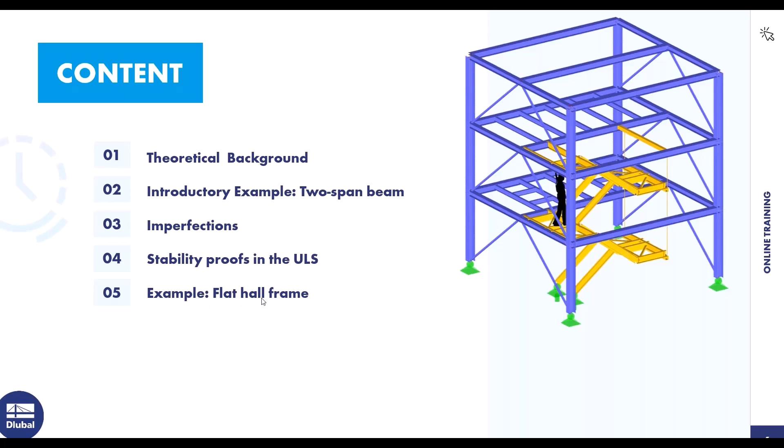First, I'll say something about the products for design according to EC3. The most important add-on is the steel design add-on. With that add-on, you can design steel members according to international standards like Eurocode, AISC, and so on. We calculate or design according to Eurocode today.

Then there's the add-on torsional warping. With that add-on, you can consider the 7th degree of freedom and the torsional warping. Then steel joints - with that add-on, you can analyze steel joints based on the finite element method. Then there's the cross-section program, RSECTION.

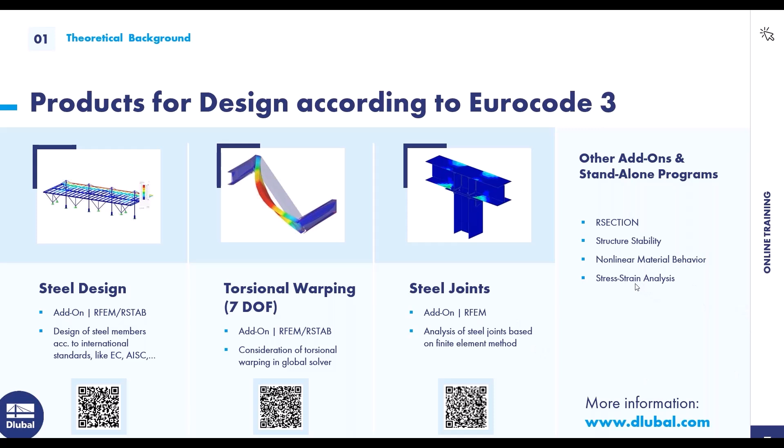Then the add-on structure stability - we use that add-on in the second example. Then there's the add-on nonlinear material behavior. You can, for example, consider a plastic design of steel plates and so on. And then there's the add-on stress strain analysis.

Okay, then a little insight into the whole safety concept in steel construction. The actions should always be smaller than the resistance. Those are the actions, this is the resistance. In addition, we have certain coefficients that we have to take into account depending on what type of proof is used. You can see the different coefficients here.

And those are the coefficients for the German national annex. You can see there is for the stability analysis another safety coefficient. But if you select the German national annex, for example, or another national annex, this coefficient is considered automatically from the program. It's automatic.

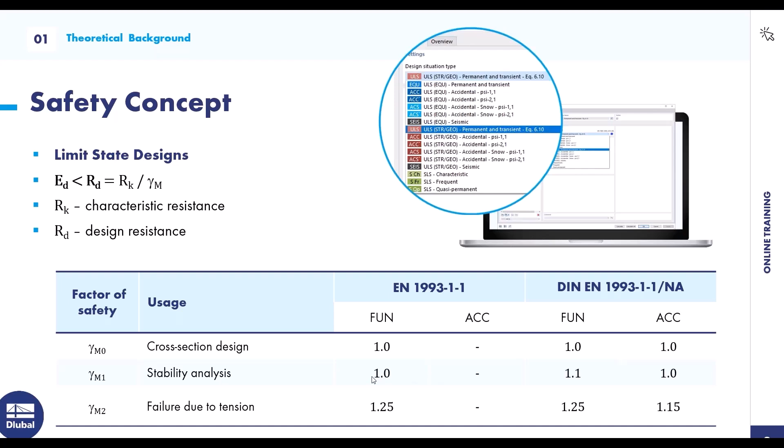So, okay, then the next slide. Elastic or plastic global analysis. Whether an elastic or plastic calculation is possible always depends on the cross-section classes. There are 4 cross-section classes.

The first cross-section class has a high rotational capacity, and this allows a plastic structure calculation. For example, you can consider plastic hinges, but it's not so often used in practice. And the cross-section resistance can be applied plastically.

Cross-section class 2 has a low rotation capacity; this allows an elastic structure calculation. And as with cross-section class 1, a cross-sectional resistance can also be applied plastically. The first and the second cross-section class are where you can consider a plastic cross-section resistance.

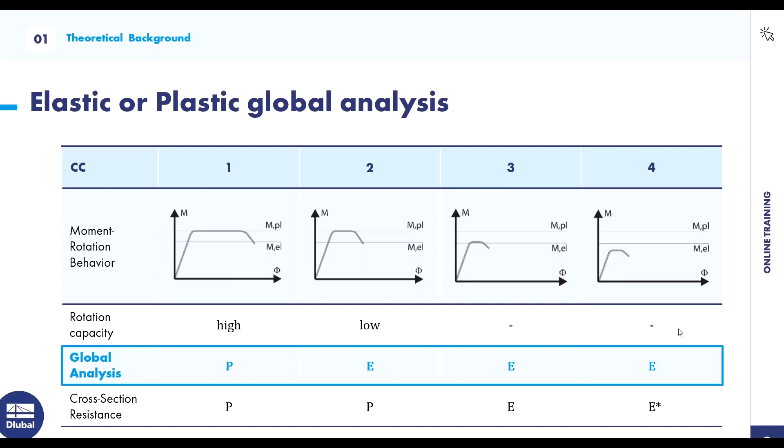Okay, then we turn to the next slide. That's the first example, the two-span beam, with a field length of 12 meters, 12 meters left and 12 meters right. A beam IPE 550, steel S235, a self-weight load case, and a load case with an imposed load.

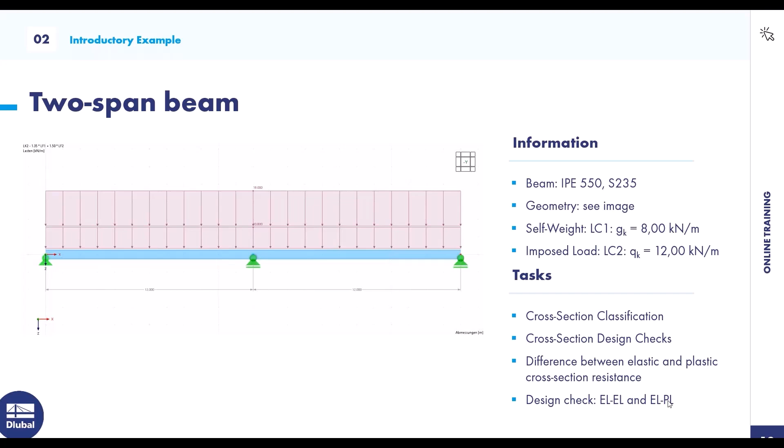And we will calculate or do a cross-section classification, cross-section design checks, the difference between the elastic and plastic cross-section resistance. We take a look at the design checks: elastic, and elastic-plastic. Okay, I turn to RFEM.

That's the second example, it's already prepared. But for the first example, I will model the complete structure. File, new.

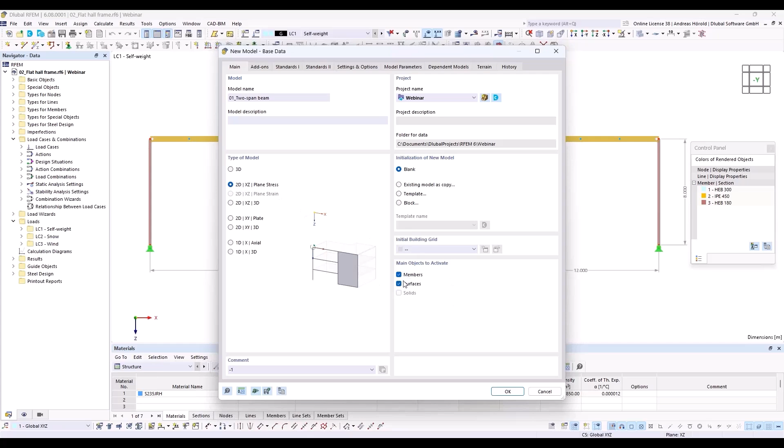So I enter 01_Two-span beam. Then type of model 2D is sufficient. We consider only members, but you can also select surfaces, that doesn't matter. And we select the steel design add-on.

Then we need to select the standards. You can see there are, for the load case classification and the steel design, different international standards. We select the Eurocode, and for today we are in Germany here, we select the German National Annex.

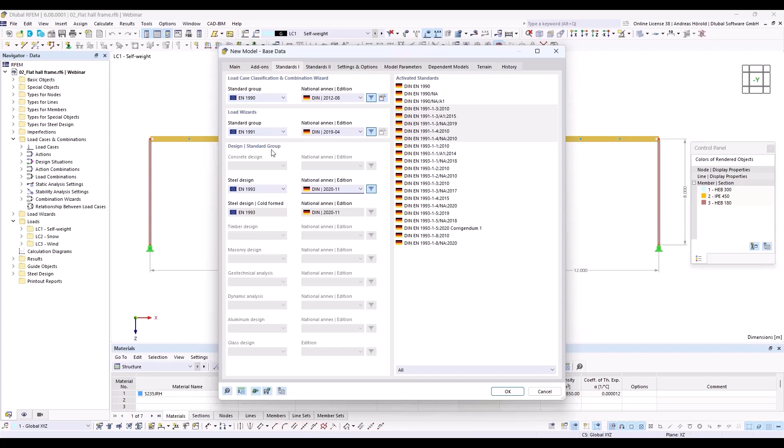We don't use the load wizards, but we use the load case classification and the steel design. We leave the dialog with OK.

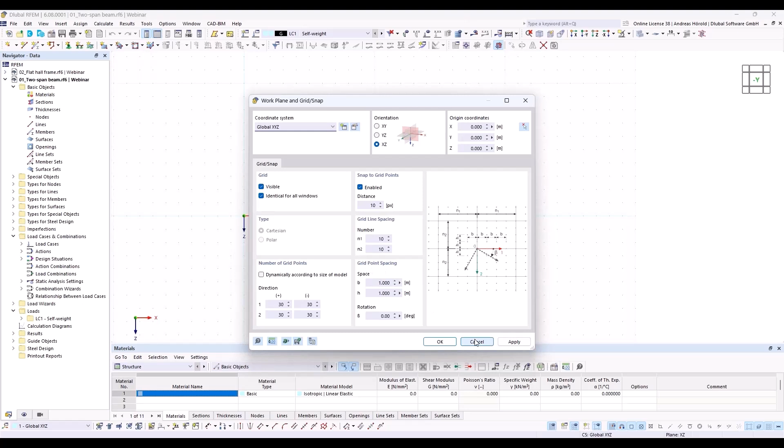So I turn to the view -y, move it a little bit. So the grid is 1 meter. I leave that. If you want to change that, you can click on this here at the bottom, display grid, right click and then edit, and you can change the space for the grid points. So I start with the beam, here left above, new single member.

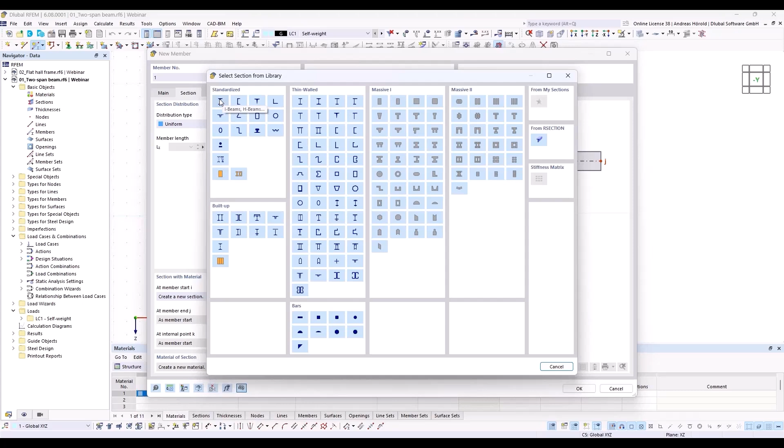I need to define a section. Create new section, I turn to the library. Left above, an I-beam. If I'm too quick for you, yeah, that doesn't matter.

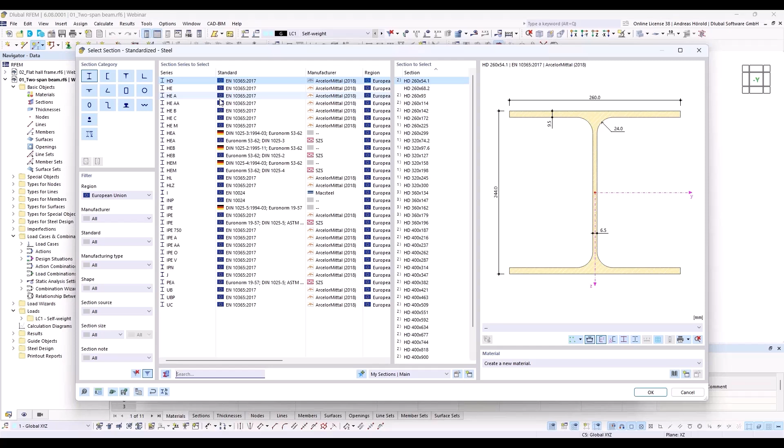That's sufficient. Okay, I select IPE 550, and right at the bottom I open the material library.

I select European Union, steel, carbon steel. There are a lot of steel materials. I use the steel material S235.

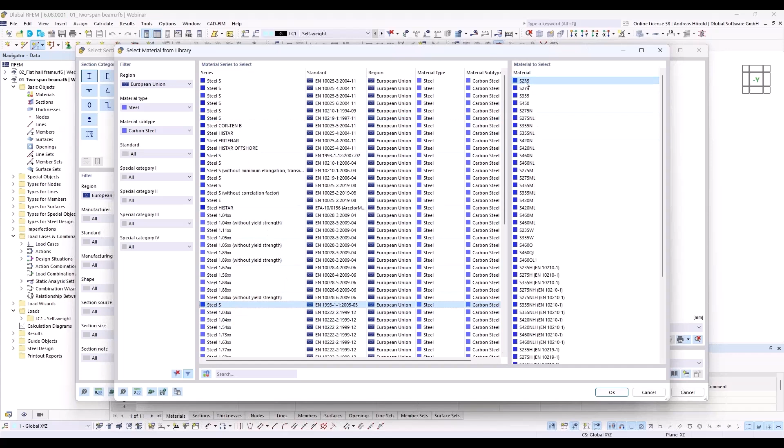Okay, you can see now the color is blue. That's okay.

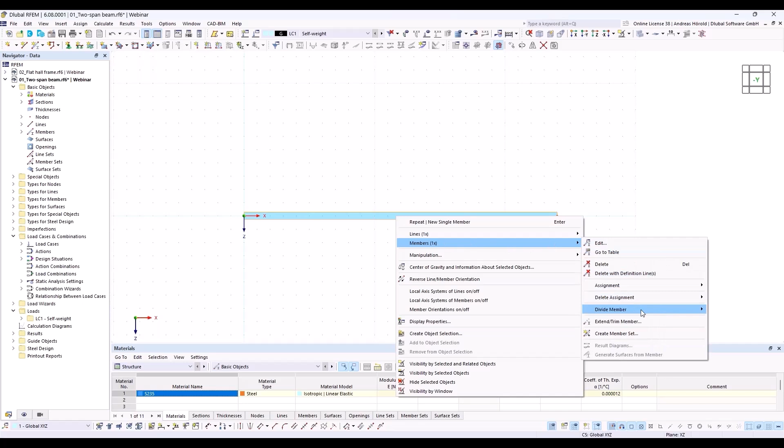So I create a member with a length of 24 meters and I divide the member in the middle with right click, members, and divide member and intermediate nodes. One intermediate node, and I create that node without dividing the member. I select this option here, create on member nodes without dividing member.

Okay, there's the node. So then I create the supports. Here left above, assign nodal support.

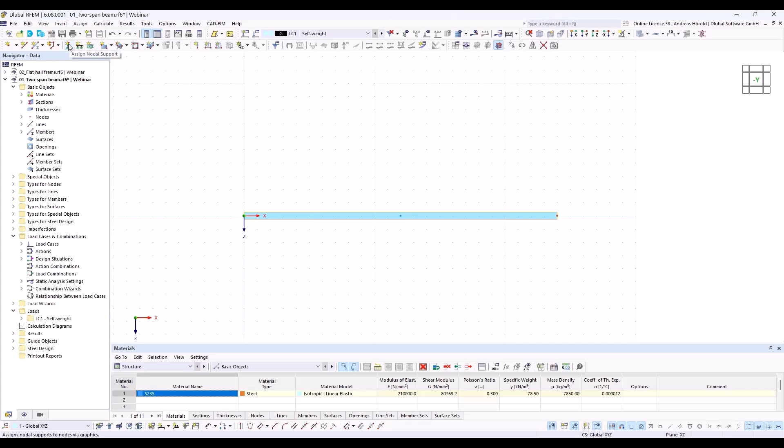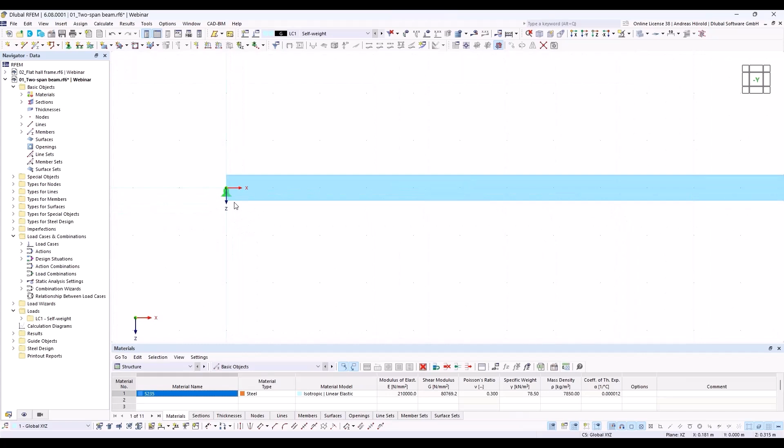So I press the edit button to take a look if all is okay. Yes, we support in X direction and in Z direction. Okay, and this node is quite a little bit small. With a right click, I can increase the size of the support. Okay, that's enough.

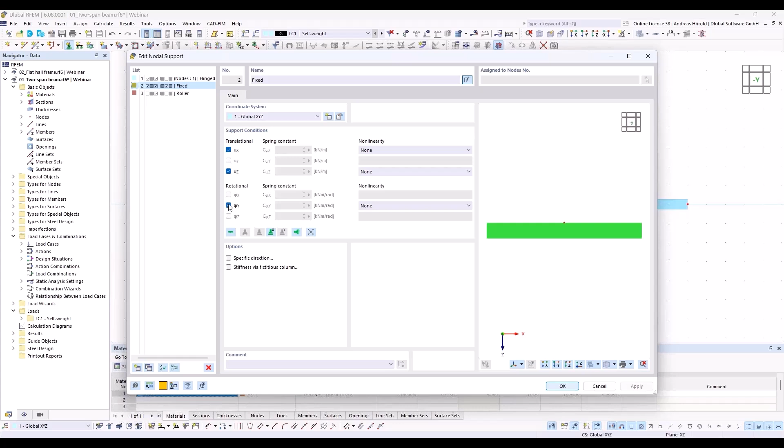So next support, I select the second support and press the edit button. Yeah, we don't want to fix the rotation for the support, and we deselect the fixing in X direction. We only want to support the member in Z direction.

So that's all for the model. I create the loads. There's a self-weight load case. I select here edit active load case. The self-weight load case is automatically created for every model, and you can see also the self-weight of the structure is activated. Yeah, that's correct in our case.

So, above, here, this button, new member load. And our load should be a force, uniform. You can see there are different options. And the load direction should be in Z direction, in this direction. So the load magnitude should be 8 kilonewton per meter.

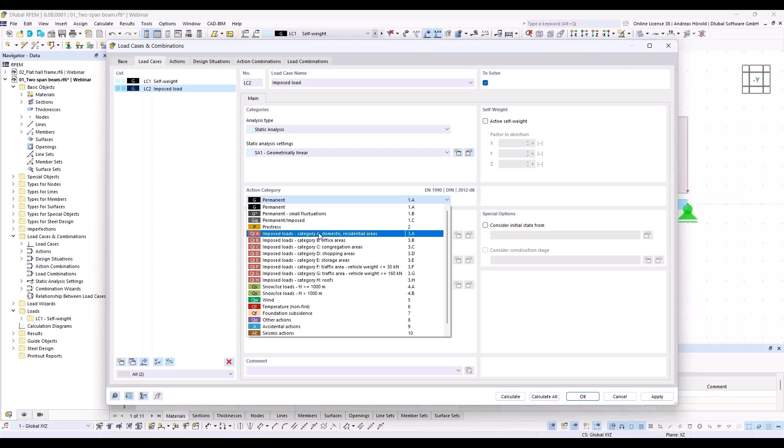Okay. So then I create a new load case with that button. I call it imposed load. And I select the action category, not permanent, but imposed loads.

Then I have to create the load for this load case, new member load, and this time 12 kilonewton per meter. That's all for the model and for the loads.

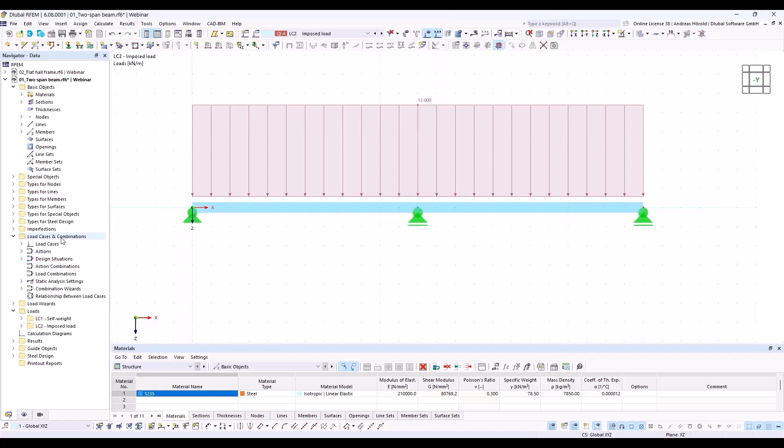I open the load cases and combinations dialog again, this time over the navigator data with a right click. Load cases and combinations, where are the base data. Now, at the beginning, we selected the standard group Eurocode and the German national annex, and we activated the combination wizard. Those are my two load cases.

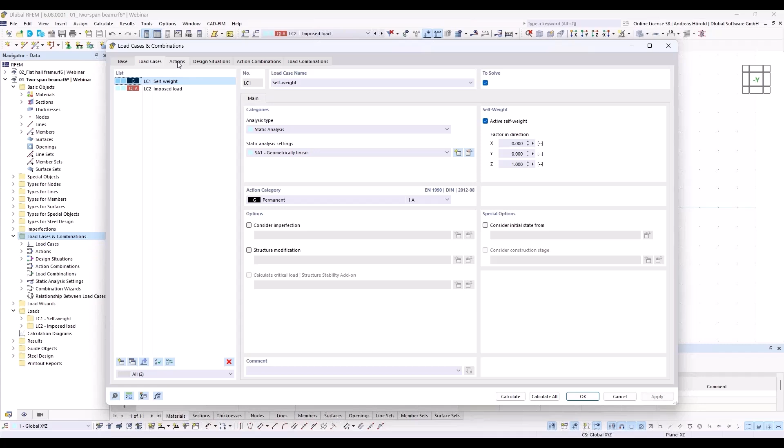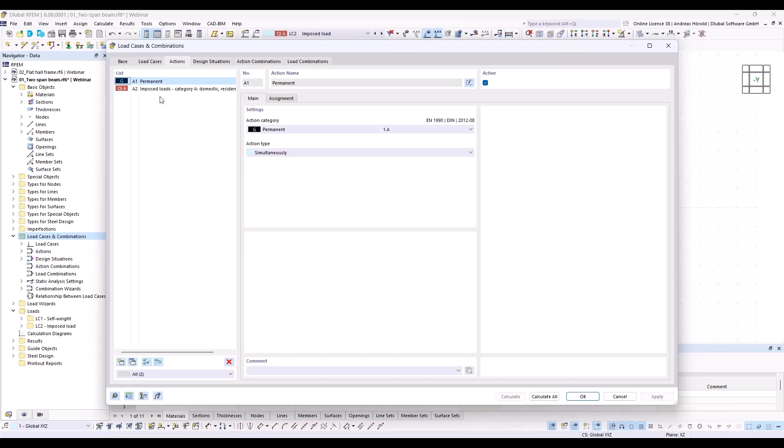We've got only two actions. That's quite important when you have, for example, 4 wind load cases. Then there's only one action for the wind load cases. And you can combine in the load combinations either wind in -x or wind in +x and so on.

So then there are the design situations. We would like to design only according to ultimate limit state. That's why I delete the design situations for the serviceability limit state. And what's important, we need to activate the steel design.

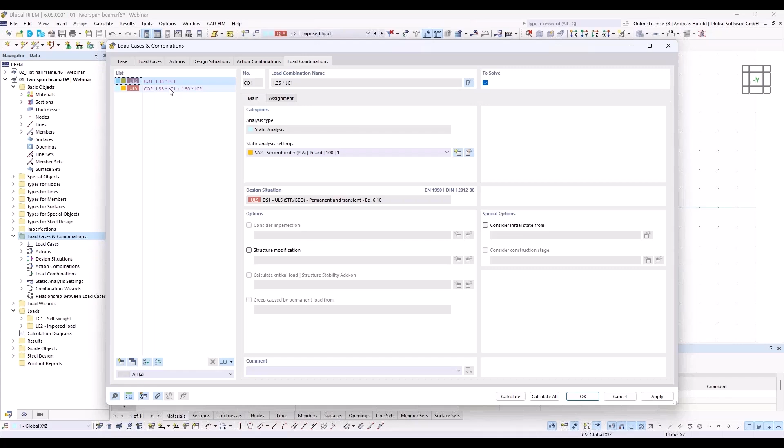So, and there are only 2 load combinations. And if I turn back to the design situations and to the overview, where these 2 load combinations are assigned for the design situation, ultimate limit state design. So then we can calculate also the steel design.

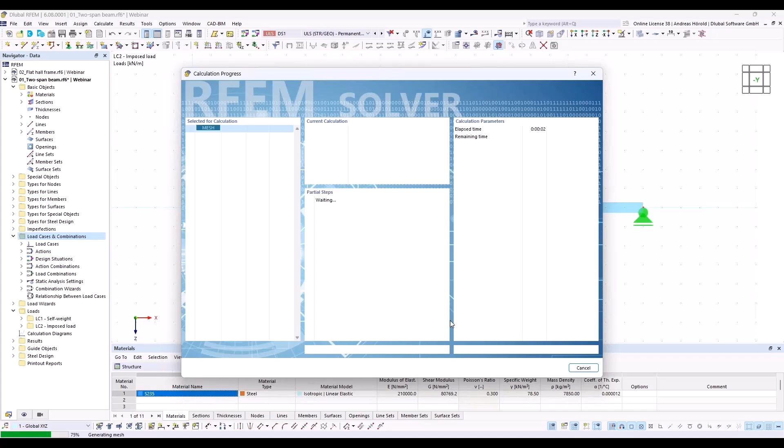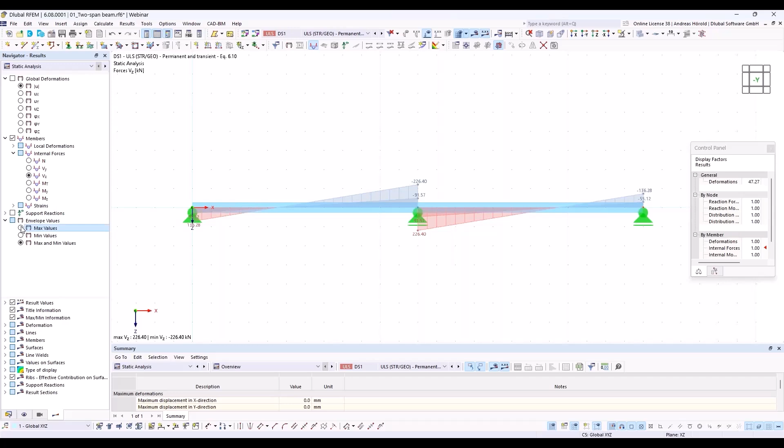At first, we take a look at the internal forces and the navigator results on the left side. The Vz, for example, I can also select only the maximum values, not minimum and maximum. So, Vz and My.

So, and then we can go to the table at the bottom and to the steel design. An error is displayed after the calculation. This is because we haven't made any steel design settings yet. We are only interested in the cross-section verification here. Therefore,

we change to the table design ratios and members. So there's the section proof for shear and for bending, and you can see a plastic design was done for the program. So if I select the line and press this button, design check details, this dialog is opened.

Students' request for a detailed presentation of the proofs is now possible. You can see the equations and where you can find it in the standard.

Okay, then cross-section classification. You can see where the cross-section is classified, in class 1. That's why a plastic design is possible.

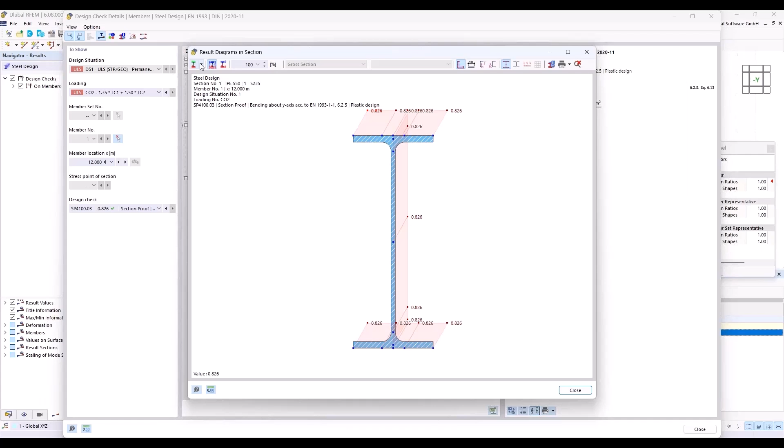So we can also take a look at the result diagram, the design ratio, the stresses. That's the stress in the middle, or over the middle support, and there's tension at the top and compression at the bottom of the cross section. So yeah, okay, that's all.

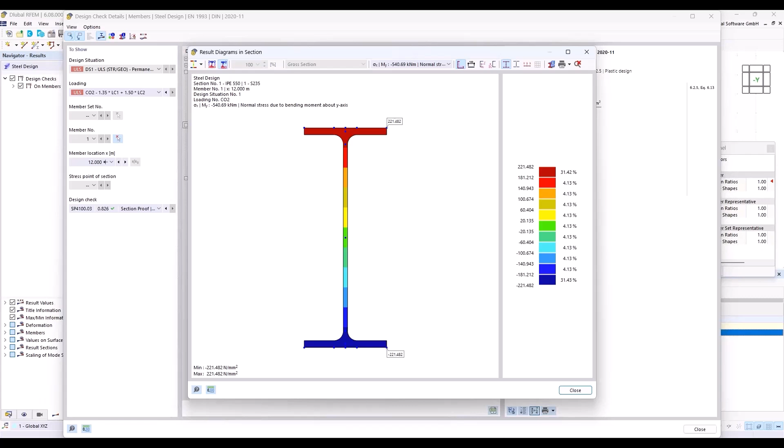Can I show also maybe the cross section information, the stress points, the different sub panels for the cross section classification, the c/t parts. Okay,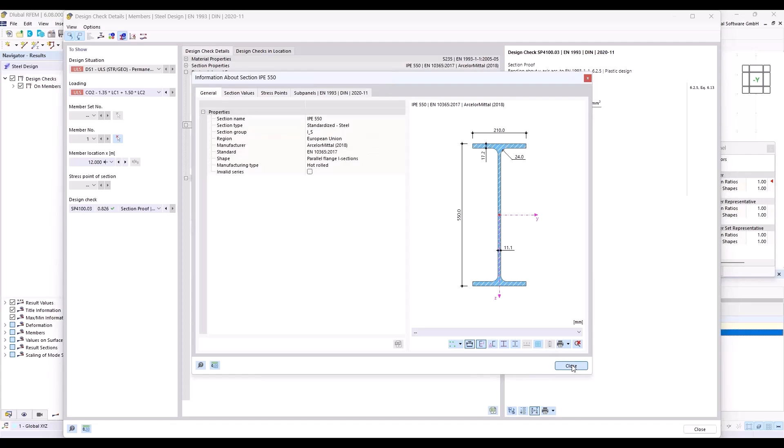That's all. Yeah, and the same, you can also, if you want to check the proof for the shear, either press that button or double click on the line, and you can see the equations from the standard.

Okay, now we don't want to do a plastic, but an elastic design. How to do that?

I turn left at the bottom to the navigator data. Then I open the steel design folder and the ultimate configurations, and I double click on it.

Then I can, for example, uncheck the stability design. Then this error message doesn't appear, but it doesn't matter. I select that button here.

Elastic design also for class 1 and class 2 sections. It's allowed to do a plastic design for class 1 and 2, but in this case we would like to do an elastic design also for the cross-section class 1. In our case, the cross-section is cross-section class 1.

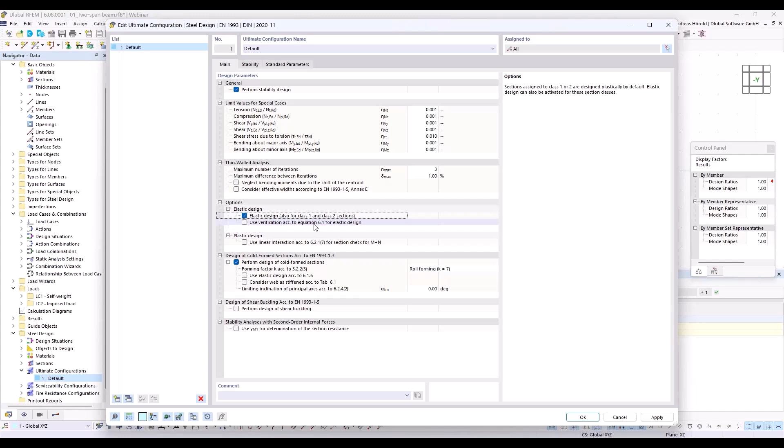Okay, we calculate or rerun the steel design again, and I select design ratios and members. I remember we had a design ratio for the plastic design of 83%, and now we've got 94%, because we do an elastic design. And if I double click on it, I can see the equation.

Okay, what you can hold in your mind is that we can do every time an elastic design. We can consider the elastic cross-section resistance. That's what we did in the second step, in that step here.

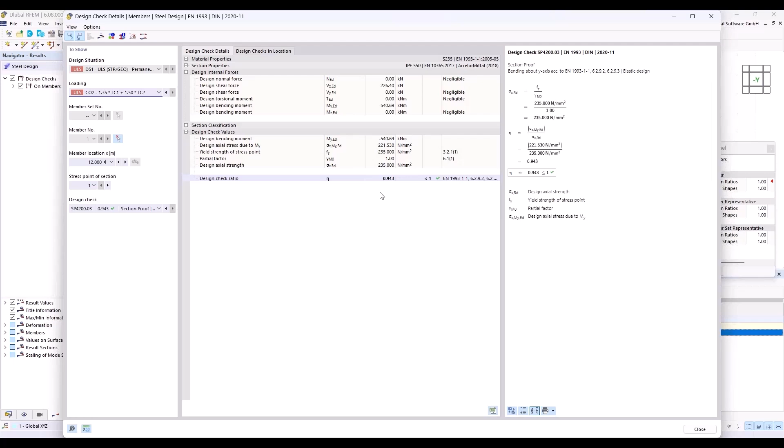So we have now learned how to carry out a cross-section check and how to take the elastic and plastic design into account. At first the plastic design, in the second step the elastic design, because elastic design is allowed for all cross sections. And in addition, we now know how to display the design formulas and compare them with our own manual calculation.

Then we turn to the next topic for today: effects of deformed geometry of the structure. In the first training course, Introduction to Member Design, it was learned how the results can differ between the calculation according to the first order theory, the geometrical linear analysis, and the second order theory.

The geometrical linear analysis is an equilibrium formation on the undeformed system, and the second order analysis is an equilibrium formation on the deformed system.

In this example of the cantilever column, this effect can be seen very well on the basis of a slender and a compact cross-section. In the case of the slender column, the increase in the bending moment at the foot point is much larger than in the case of the compact column, if one calculates according to the second order theory. And there's no difference when you apply the geometrical linear analysis.

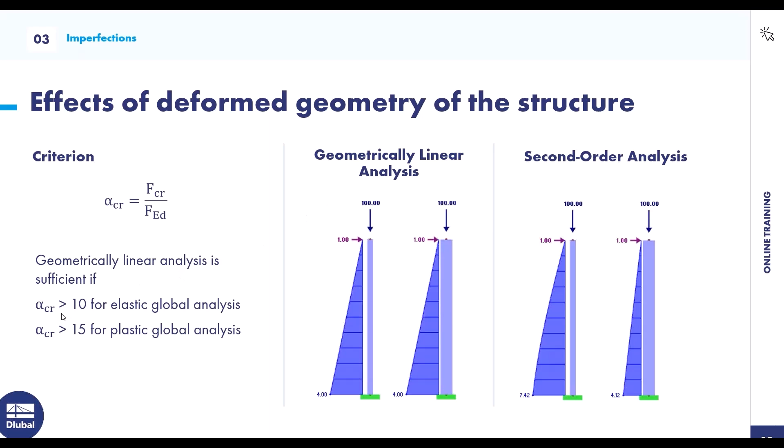So then the next point is equivalent geometric imperfections. Imperfections are closely related to this topic. In Eurocode 3, these are generally grouped together as equivalent geometric imperfections. What are imperfections anyway? They are production-related deviations in the model geometry and or in the material properties. There can be real misalignments in classic hall constructions, or tolerances in production, especially when rolled sections are used. These imperfections can be summarized as equivalent geometric imperfections.

On the left side of the graphic, you can see the initial sway, the global imperfection that can be applied to the structure. And if individual components are to be examined more closely, there is the local equivalent imperfection, for example, an initial bow imperfection. This depends on the selected profile, the yield point, the buckling curves, and the proof method. These two variants are the possible equivalent geometric imperfections.

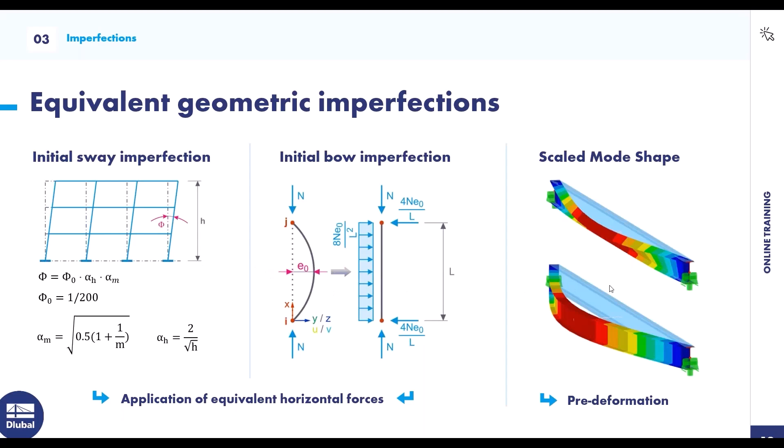Another alternative is pre-deformation, which can be calculated with the help of stability analysis. The respective governing eigenmode is scaled and applied as an imperfection. That's not so often used, but it's possible. What's often used is the initial sway imperfection or the initial bow imperfection, or both. You can see that in a later slide.

When designing steel in RFEM, 3 different stability analyses are carried out. On the left side, there's the classic flexural buckling as a lateral deflection. In the middle, you can see torsional buckling in pure torsion. And on the right side, lateral torsional buckling as a combination of the two previous proofs.

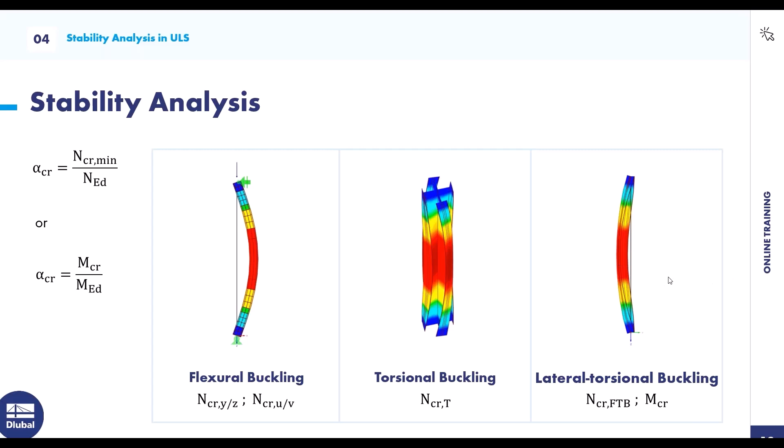Okay, methods for stability analysis. There are 3 methods. Method A: you have to apply a global and local imperfection, and the structure analysis should be done with second order analysis. Then you can do the cross-section design checks with the internal forces.

Method B: global imperfection means only this initial sway imperfection. Then the structure analysis is according to second order analysis. What's quite important is you have to consider the buckling length by the member length, not with a factor. SK is equal to length.

Then method C: structure analysis according to geometrical linear analysis on the ideal structure, but in that case with the real buckling length. Important to method C is that the structure component design can be carried out for flexural buckling with the internal forces according to the geometrical linear analysis, which were determined on the ideal structure without the use of imperfections. But in that case, here for the frame, only for the columns, because by considering the system buckling lengths, the moment agrees according to the second order analysis, and the effect of the equivalent imperfections is already taken into account.

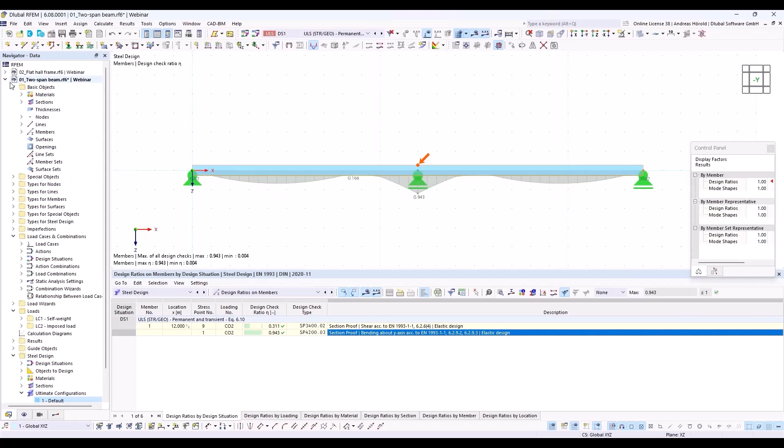So then I turn to the program, to the predefined example. That's the construction self-weight load case, then a snow load case with loads, for example from purlins, and a wind load case, wind in X direction with wind pressure and wind suction.

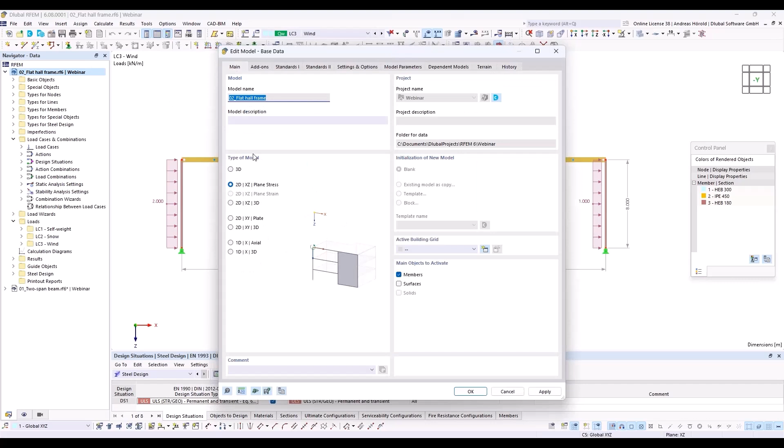Left above, I return to the base data, a 2D model, and we use the add-ons structure stability and the steel design add-on. We select the standards, Eurocode, and the German National Annex. We use the add-on structure stability to check whether we are allowed to determine the internal forces according to the geometrical linear or second order analysis.

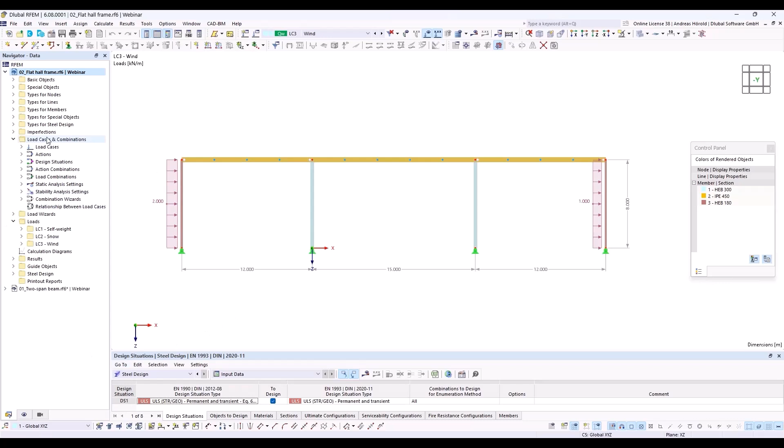That's why we turn to the load cases and combinations, and I go directly to the design situations. I select the geometrical linear analysis, edit that, and activate the stability analysis. Okay, and I run the calculation.

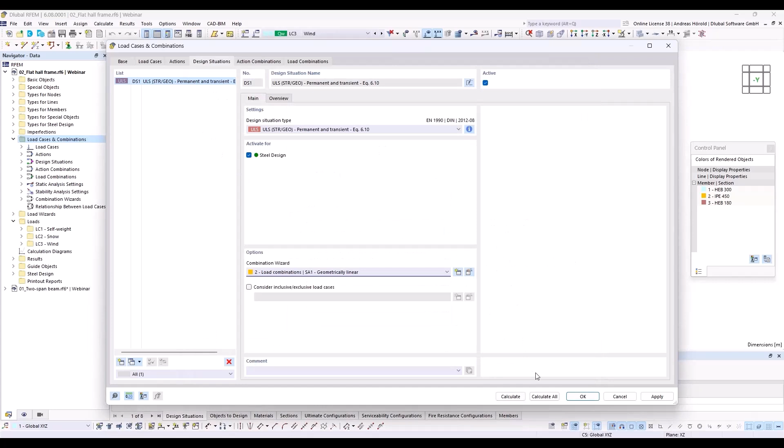So after the calculation, we see the minimum critical load factor, 6.05 for the design situation, and 6 is smaller than 10. We need to do a stability design by using the second order analysis.

But what I already mentioned, for the stability design using the classic equivalent bar method, means method C, the internal forces can be calculated according to geometrical linear analysis, and buckling lengths must be assigned to the columns. But for the design of lateral torsional buckling, the application of the second order analysis is also required with this method. That's why I switched to the second order analysis.

For the columns, we consider the effect twice: one time with the second order analysis and with the real buckling length. But we need to apply the second order analysis because of the horizontal beam and the lateral torsional buckling.

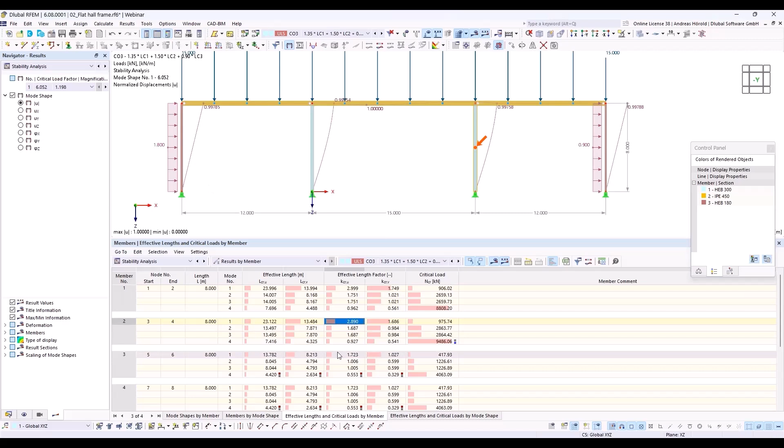So this column has an effective length factor of 3. This column, we also apply 3. And for the left and the right column, 1.72.

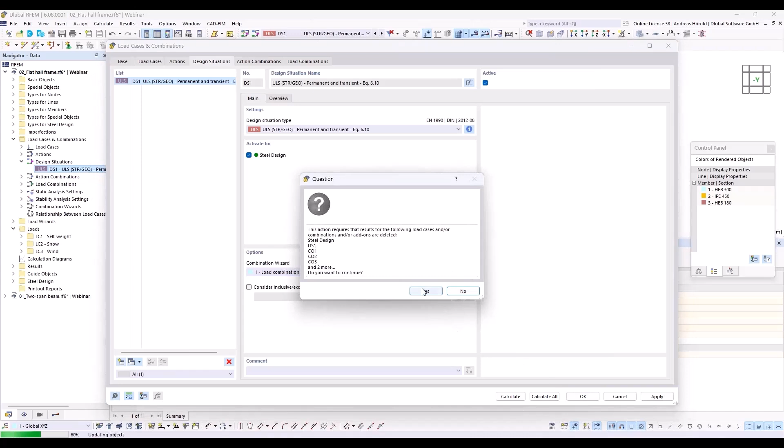So I turn back to the design situation and we use the second order analysis. Okay, that's okay. So now we define the effective lengths, or we assign them to the columns.

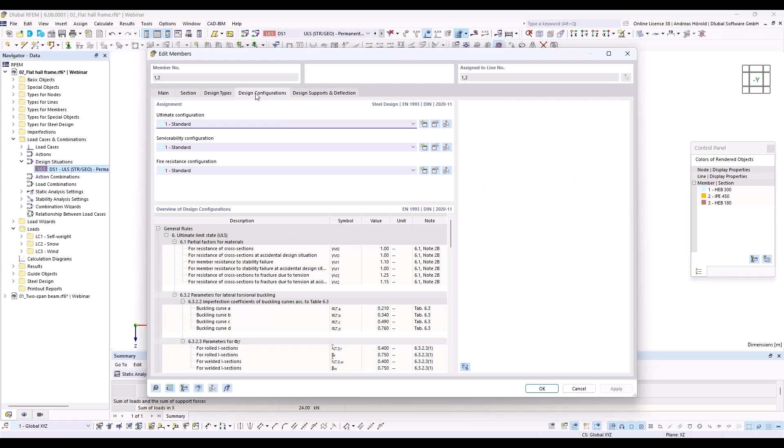I select the inner columns, then I do a right click, members, edit, and I turn to the design configurations and design types, and I define effective lengths.

Then I select the left and the right column. I press the control key, you can see the plus sign. I would like to select both columns. Then right click, members, edit. The same procedure: design types, effective lengths, and 1.72.

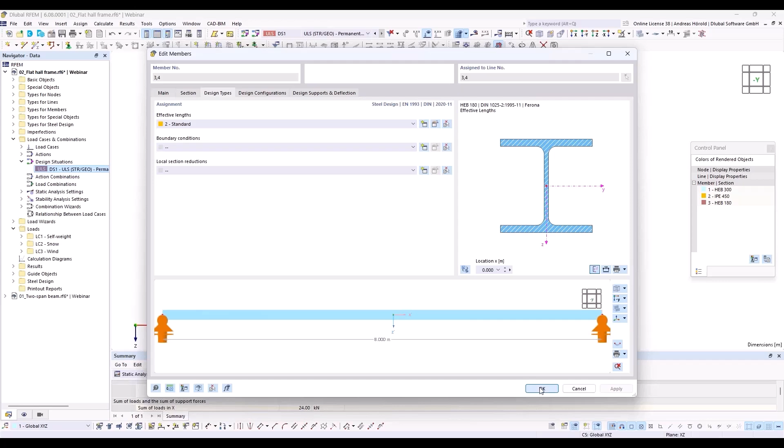And you can display the effective lengths. Then we go to the navigator display, then types for steel design, and I select member effective lengths. And you can see the factor 3 and 1.72.

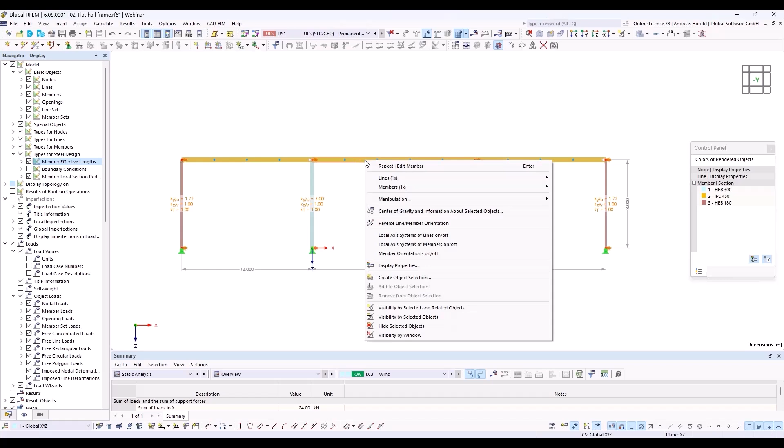So then I select the inner horizontal beam by right click, members, edit, then design types, effective lengths. I create a new effective length. This time we would like to consider the horizontal supports, for example by purlins.

That's why I press this button here, select member or member set. I select this member, and the program will detect all these nodes here. Okay, you can see that here.

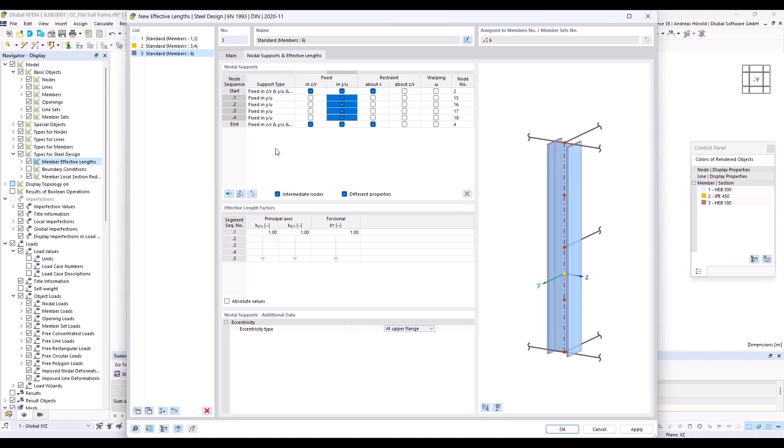And we would like to fix it in the horizontal direction, and I would like to consider that the upper flange is supported, since the purlins lay over the horizontal beam. That's why I select all these lines here, and I define eccentricity type at upper flange. I can leave the dialog, and you can see the supports: fork support at the beginning and at the end, and for the inner nodes, only a horizontal support at the upper flange by the purlins.

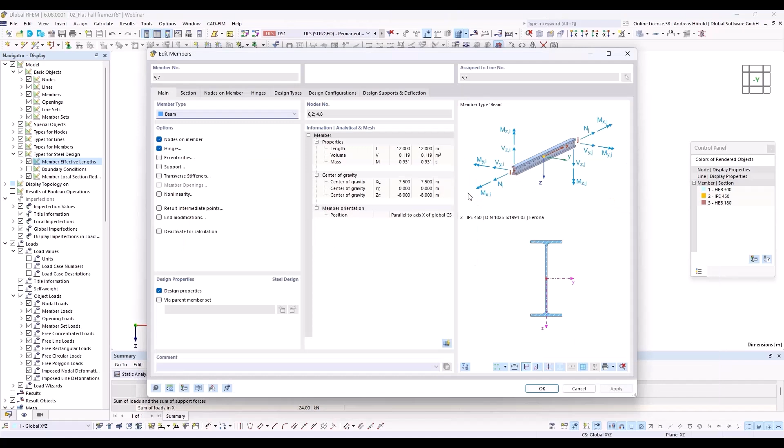So, okay. We need to do the same for the left horizontal beam and the right one. I select both with the Control key. Then members, edit. And I select the same effective length as for the middle horizontal beam, and you can see the program automatically detects that there are only 3 nodes. You can see 3 nodes are supported and 4 nodes.

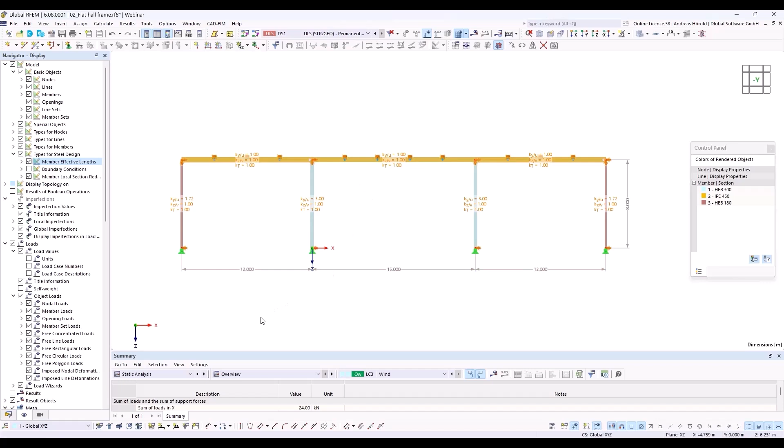Okay, then we can run the calculation. I turn to Steel Design and press this button, Show Results, and the calculation starts. So the calculation is done.

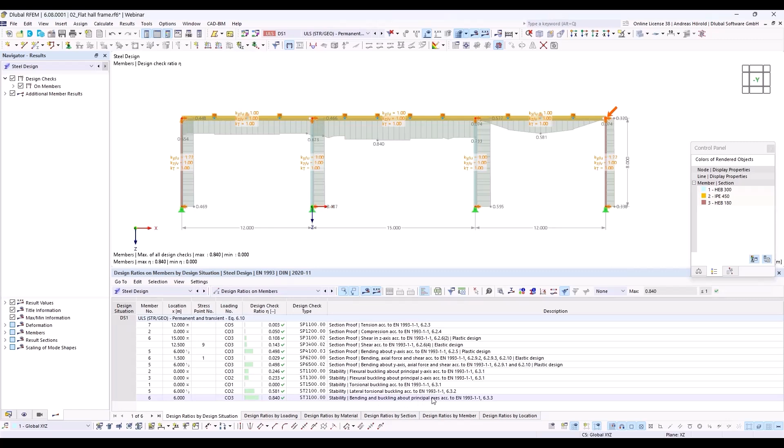We have a maximum design ratio of 84%, stability, bending, and buckling about the principal axis. So I can double click on it and you can see the design checks, the equations, and where to find it in the standard.

Okay, this was the classic structural component design, method C, without imperfections but with effective member lengths. Now we want to examine the model using the approach of global imperfections and the structural component design method B.

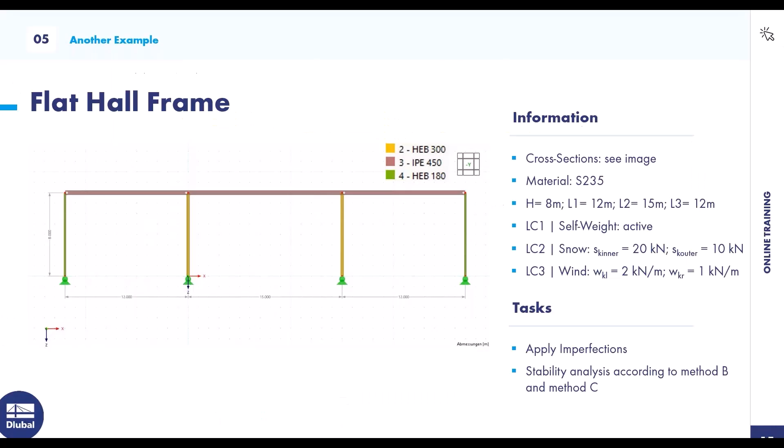I turn back to the PowerPoint. We did method C, with the effective member lengths and without imperfections. Now we define imperfections, and I delete the effective member lengths for the columns. We say, or we consider SK equal member length.

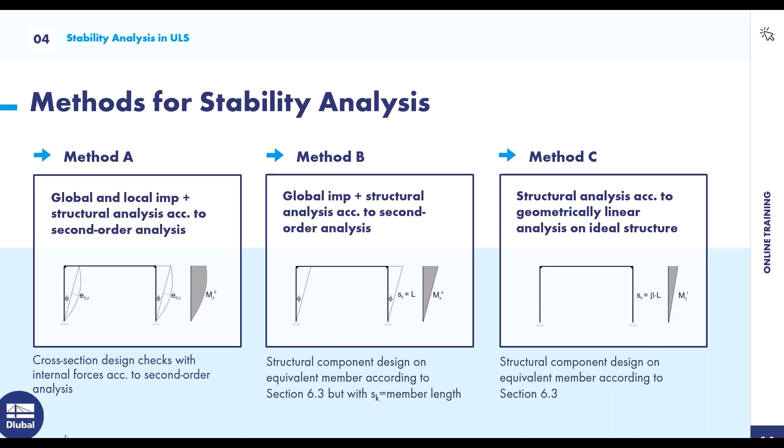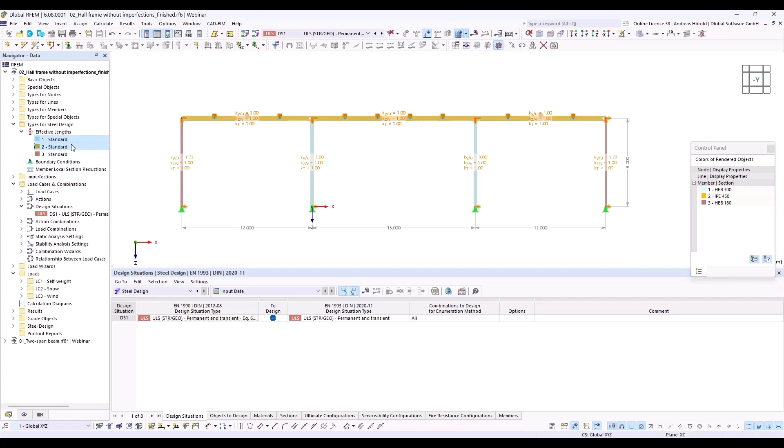So without imperfections. Okay, I overwrite it. So, and now I delete the effective member lengths, or the buckling lengths, for the columns. Delete. Okay.

And in the second step, I need to define imperfections. So above here, that button, new member imperfection. I have to create an imperfection case in the first step, imp x. We have got imperfections and imperfection cases. You can consider more imperfections in one case. That's why we have imperfection cases and imperfections. That's the case, okay?

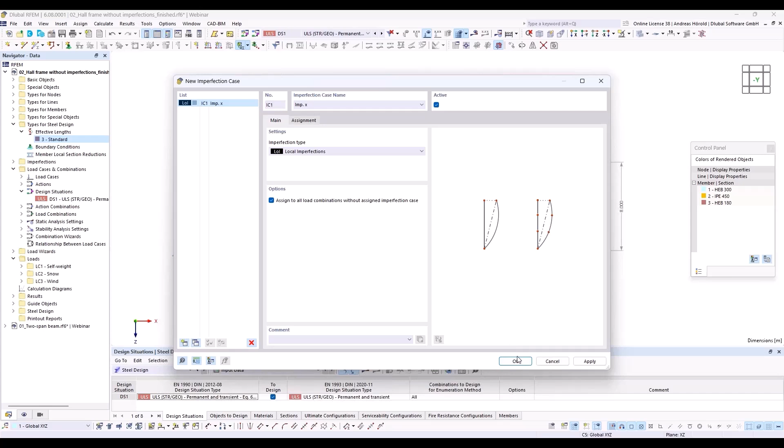And now we create the imperfection for that imperfection case. We define an initial sway. Definition type is Eurocode 3. The imperfection direction is set, in the strong axis.

Then the basic value is 200. I can measure the structure height, 8 meters. Number of columns in one row, those are 4. Yeah, and the reduction factors are calculated automatically.

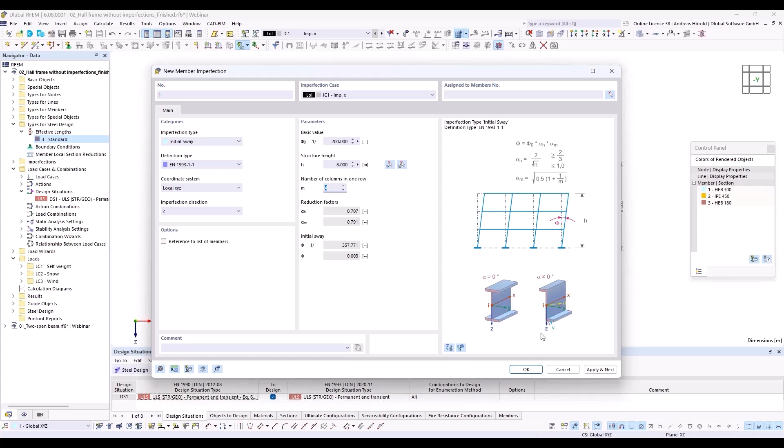Okay, and I need to assign it to all 4 columns. And to display it, I have to press this button above, Show Imperfections. So, and now we can run the calculation.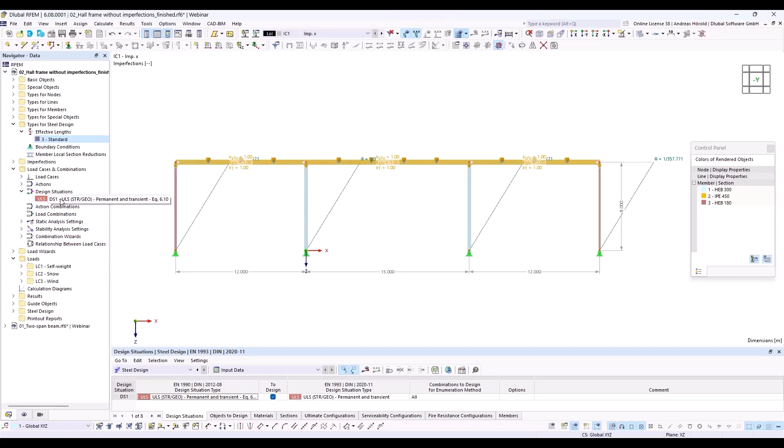Or before I do that, I take a look at the design situation, your second order analysis. And it must be checked that the program considers the imperfection cases. Okay, now we can calculate all.

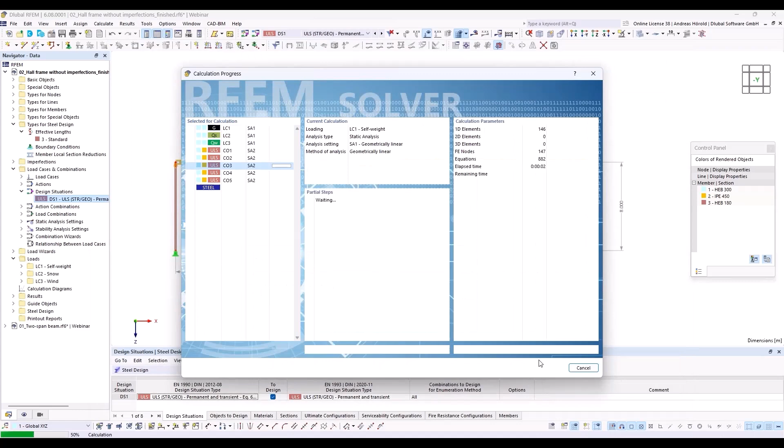So we go directly to the steel design, design ratios on members. Yeah, and you can see the design ratios. With method C, we had a design ratio of 84%. Now we've got 86%. That's quite similar, different methods.

Okay, yeah, that should be all for today. You learned in the second example how you can apply method C in the first step, and then with imperfections, method B, in the second step.